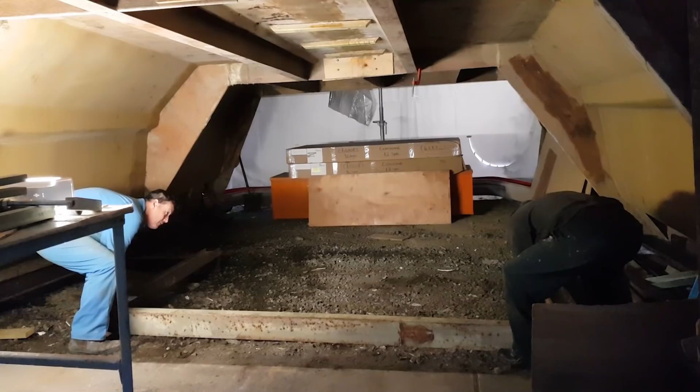But we're certainly not going to be demoulding it on video for a couple of weeks yet. There's a lot to cover before we get to this stage. I'll give you a couple of little sneak peeks before we go forward. The underneath frame of this mould needed to be reinforced in a certain way. We had a bridge structure like this, and when we lifted it, we wanted to make sure that it didn't sag. So that's where I'm going to start this video.

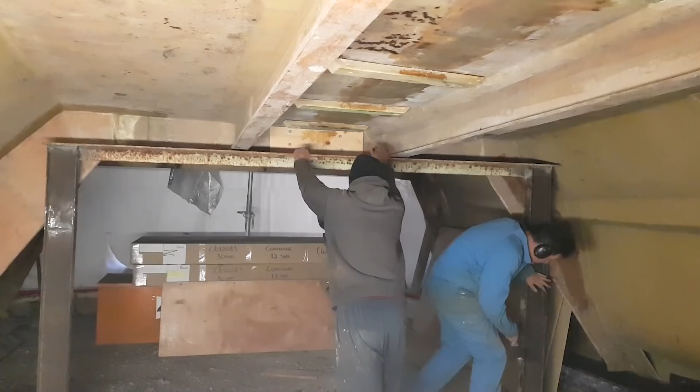I employed a technique where I welded some lugs to the framework of the mould and then used three-ton acro props to actually push the legs and the framework of the mould apart, to make sure that as I lifted it there was no chance it was going to cave and trap my boat in there or damage it. So that was the first part of this video.

The second part, we're going to go into getting this big rig back under the mould, and man, I don't admit to many mistakes, but I totally cocked up.

I want you to remember that this video was filmed in 44-degree heat. It was the hottest day we've had in over 12 months, and having my brother involved, tempers were frayed. There's a few little swear words in this, so if youngsters are watching it, please do not listen to my expletives as I do a hell of a lot of damage to my pickup truck, and just stupidity. When the heat's on and it's hot like that, you got to make very good decisions, and in this case I didn't. So let's get into it.

So the original frame that came with the mould was about 7 I-beams running directly underneath the mould at ground level. I actually re-engineered this about 18 months ago into a bridge type arrangement that went up and over and back down, and I'll put a link to the actual video up here for you to go back and see where I did all the welding.

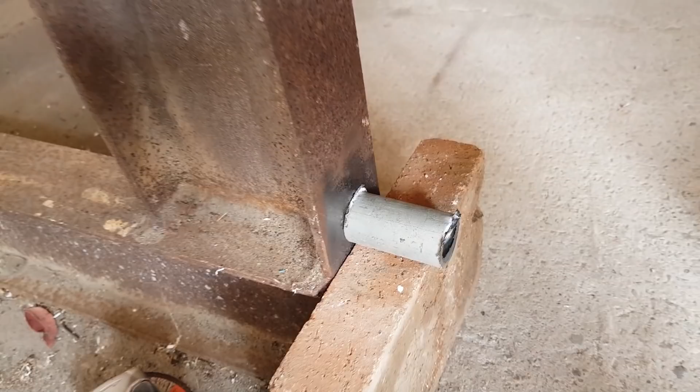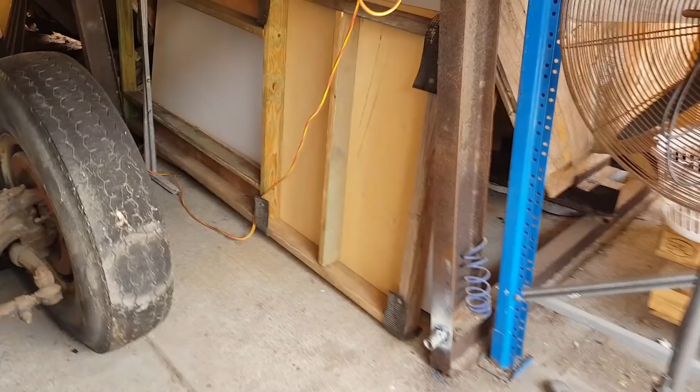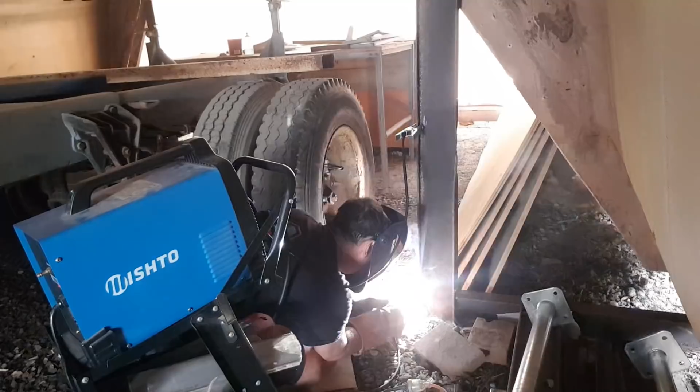But what I decided was that we needed some way of bracing the bases of these uprights so there was no chance of it collapsing inwards when I ultimately put the lift underneath. So I came up with the idea, and a couple of people had suggested that I put in a couple of acro props. In fact, I ended up with 3 attached to the uprights that still operated cleanly with the truck in place. These acro props can be tightened and physically tensioned outwards to hold the framework in the exact position that it's lifted in, and it ended up being a really good solution.

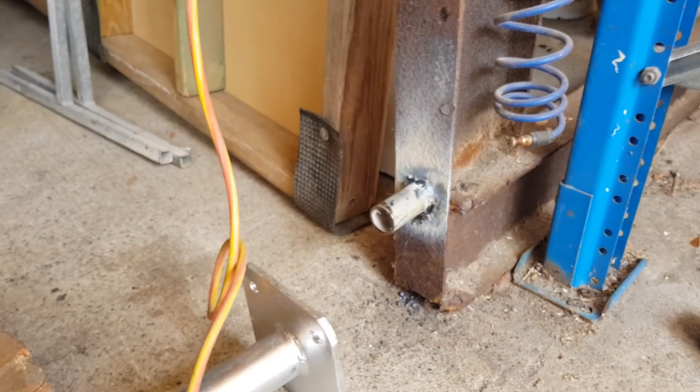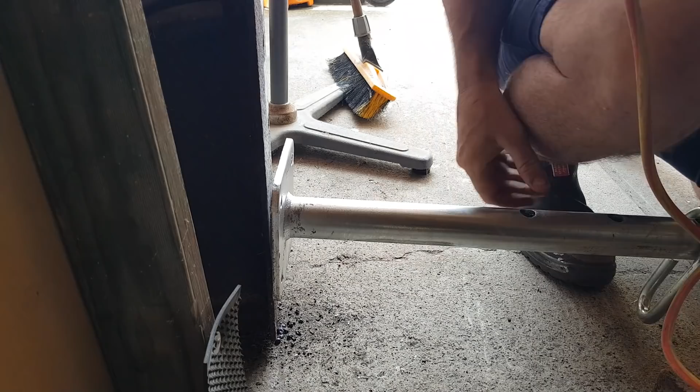It cost me a few hundred dollars to buy these new acro props, but by putting these in place I was able to lift the thing and simply remove them, then roll the truck out, and then put them back in place for when we ultimately crane the mould into its final resting place. You can see here where I've actually got it tensioned and the boat's off the ground. So there's a sneak peek of the demoulding day.

First thing I need to do is make the drawbar for the backhoe to tow this rig away with the mould on it, which is going to go about 80 metres down the road. The second thing I need to do is do the other end, so I need a pintle hook on each end. We're going to attach this to the bucket of a backhoe with a couple of giant shackles. That's going to be the easiest way rather than getting in a semi with a dog with a pintle hook closure on it. We know the rig works, we know it's going to basically tow it.

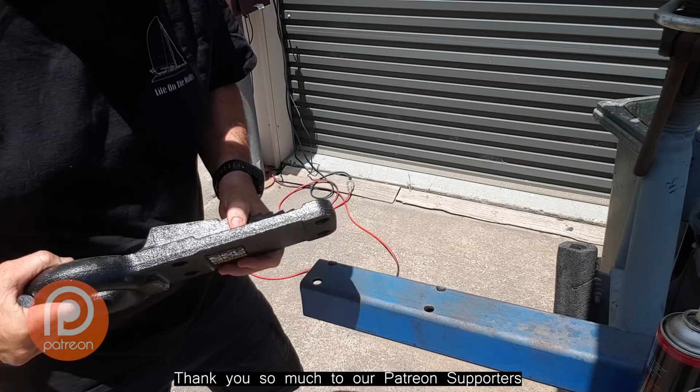Whether or not it lifts it is a different story. So I just spent about an hour drilling these holes out nice and slow. Only just got them to the right size. And I was in town today and I bought some high tensile pintle bolts. They're half inch, but they're actually designed for pintle hooks. So pretty happy about that. You know that's going to be good.

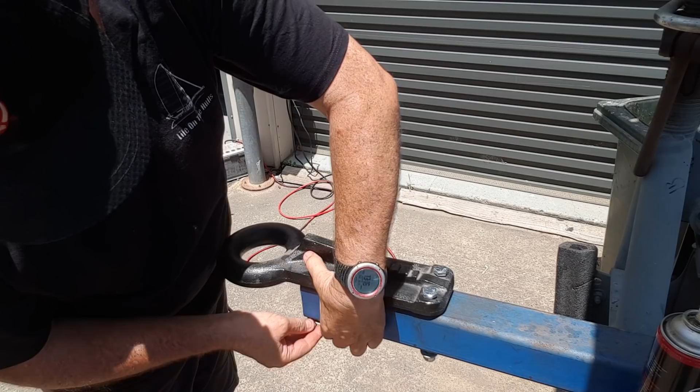I'm going to use this tow bar twice. Once to get the mould over to Greg's across the road, and the second time is to launch my boat. So it's not going to have a lot of use, but well worth paying for the good bolts rather than just cheap bloody coach bolts, which I considered using, but they were about 20 bucks cheaper and not worth the effort.

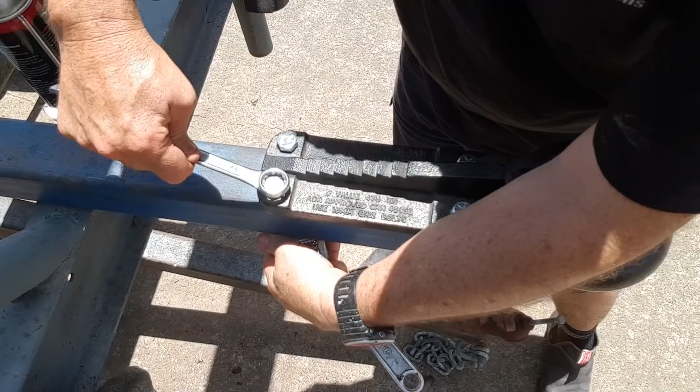And I'm back here. I've just pulled the site apart again, and I'm going to put that truck back in under there. I'm hoping I've got enough room because there's a boat here with a wheel off it right where I'd like to back, but there's always pallet jacks. I can always move a boat.

But yeah, this bugger here, we forgot about it, and it's got a wheel off. So I might have to put a pallet jack under it and move it back, because if it's in the way and I can't back this truck in, I'm in trouble.

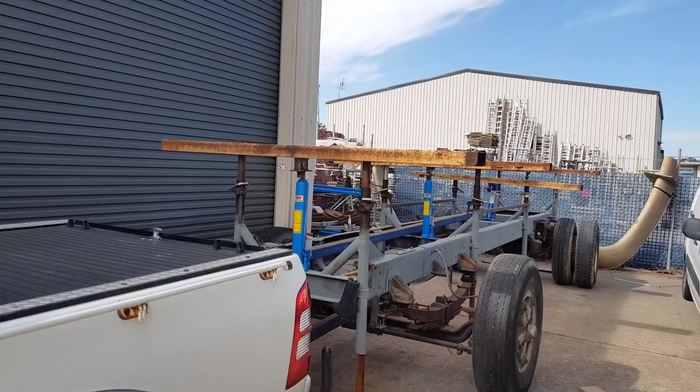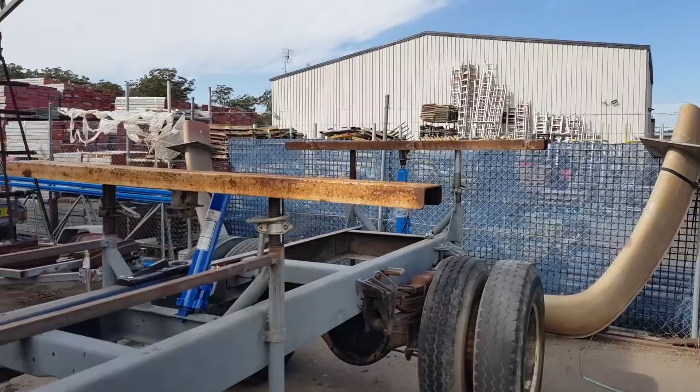But I've just done all the preps up here on the truck. I've got to wait till my brother Brett and Janet come up here for about half an hour, and we're just going to get these jacks all put in place. Still got to hose them all together, but I figure while it's the weekend and it's going to be 43 degrees here today. It was 42 yesterday, and I welded in all these gussets.

Had to worry about fire because I was really concerned I was going to set fire to the place. So you just got to be careful when you're welding in heat like that. It was a bitch of a day yesterday. I mean, it was probably the worst heat we've had since the fires this time last year, or in February or January this year.

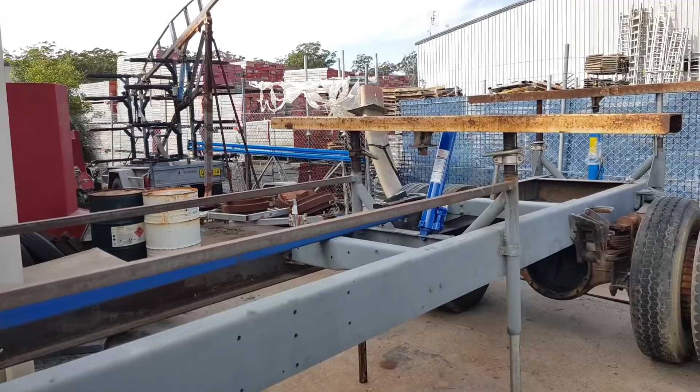But yeah, so that's all ready now. All the jacks are in place. Everything's functioning, I know everything's moving smoothly. Just got to get all these jacks lined up. Hopefully they all work, I haven't tested them all, but I'm sure they will. They're straight out of the box. But yeah, at this stage, we're on target for next Saturday's demoulding.

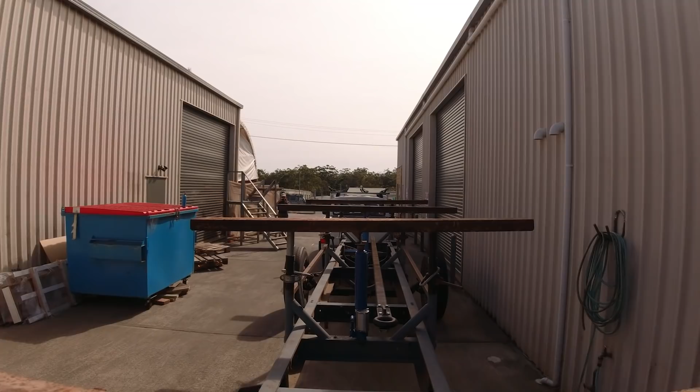Now I just want to draw your attention to a couple of things here. You'll notice here the Acrow props that protrude through the base of the truck. They're designed to go up to give support to the ultimate lift. Now you'll notice this particular one is actually only around 10 centimeters off the ground.

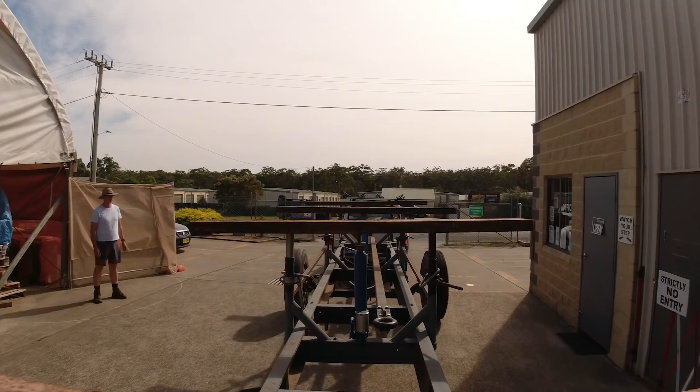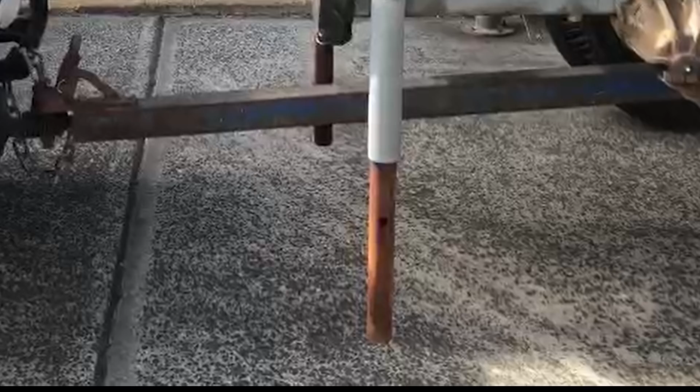Now I have a very steep driveway to navigate here, and in the heat and in all the excitement, I did actually neglect to lift this one up. This one at the front is particularly the only one I really need to lift up, and the result, yeah, it wasn't very nice. It was the beginning of a bit of a problematic morning for us, and I'll show you why.

Took a chunk out of the road. Oh shit! Just bent my Acrow props, didn't I?

I'll go forward and we're going to take it again. Right, stop.

Can't go forward, mate.

Rossco, forward about a foot. Rossco, just take it forward a fraction, mate. It's just, this is caught under your back here. You've got to get it forward so it just drops so we can get this out of the way. Speed, just, Ross, just take it forward, it'll come off. It'll go higher if I go forward. It will. Do you want a hand?

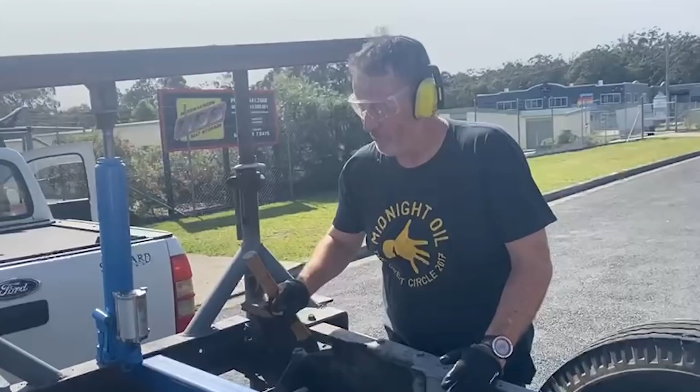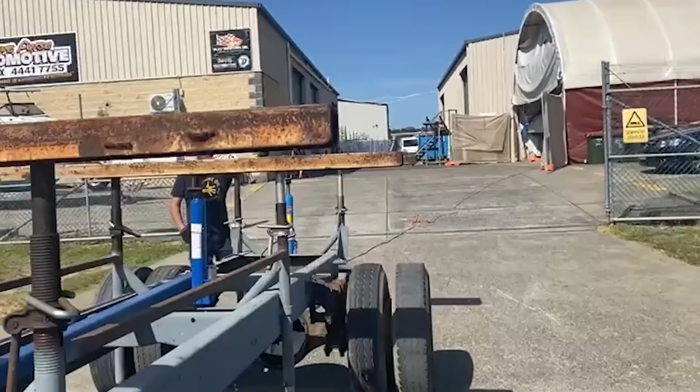Do you want to explain to us what's going on here, Rossco? Look at the car, fuck me dead. I've got it on film. Don't you worry. Yeah, I think we need a bit of slow motion for this moment, though. This was my fear, this was my fear, and it happened. But the Ranger held true.

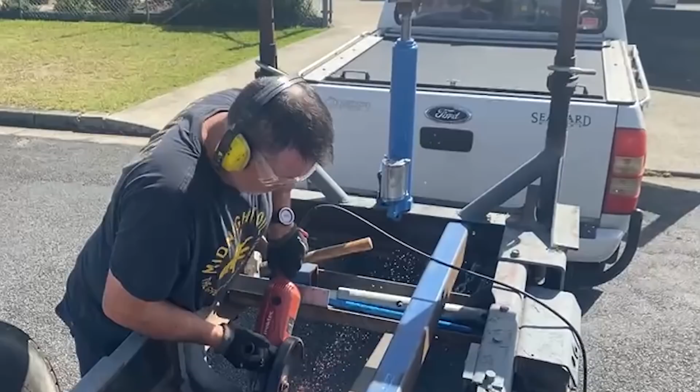One way to fix something, mate, with an angle grinder. Good job you can get them cheap, eh?

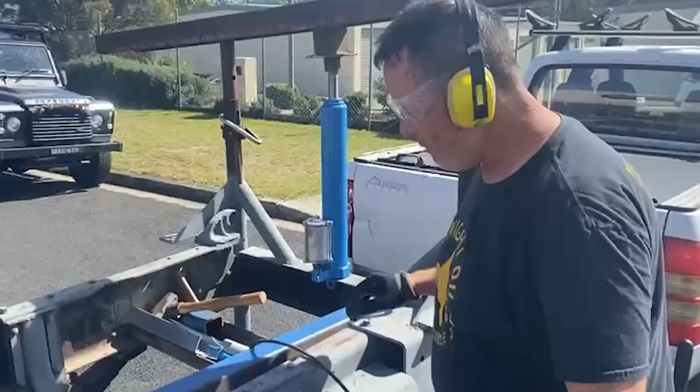So the problem with this chassis was that it had an engine cradle there that was actually quite low. That did need to be cut out because that's actually one of the reasons why the drawbar at the angle was forced upwards and jumped off the pintle hook. And the second reason why was...

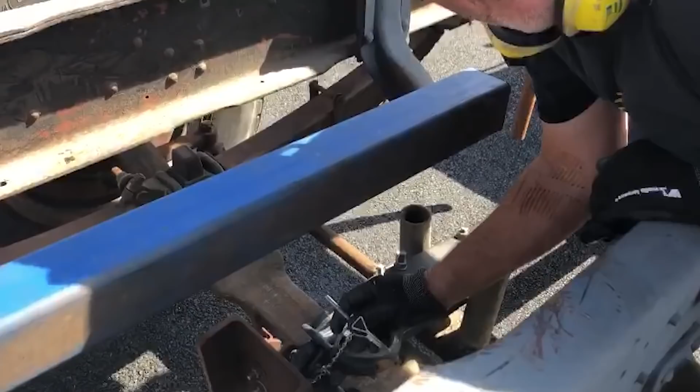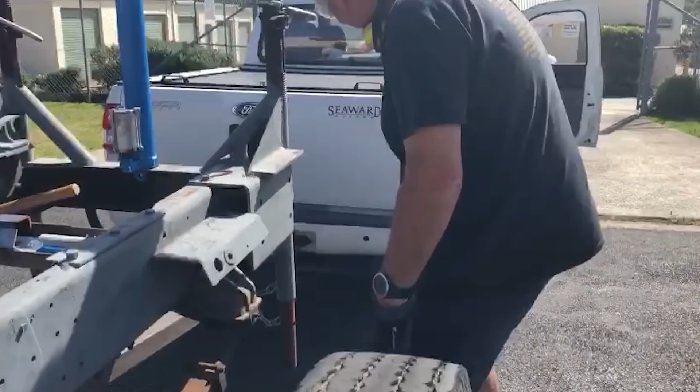You got it? What's that thing? Okay, there's a good reason why that came off. It's because in my excitement I forgot to put the pintle hook spring in, or the pin, that will stop it popping off. So hopefully that's the end of it. Actually not too bad given what it could have been.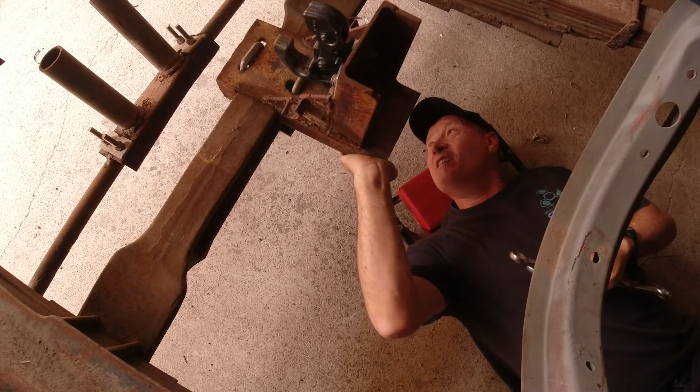Once again the effort with the steering began, and in that effort we realised we had a problem with the centre pin of the steering leading from the pintle hook. All that earlier action had actually moved the centre pintle hook bracket I'd welded up and put in, and it had become loose and slid sideways, creating more work.

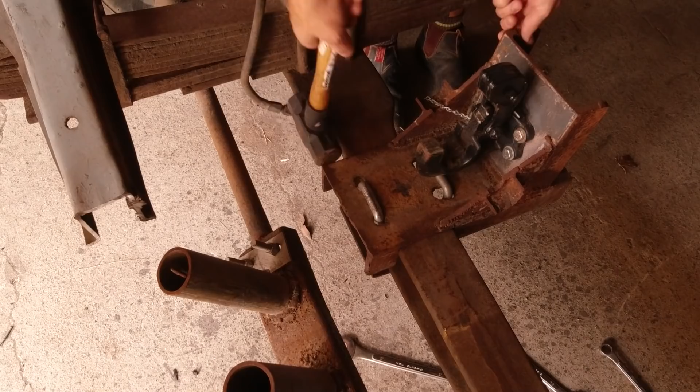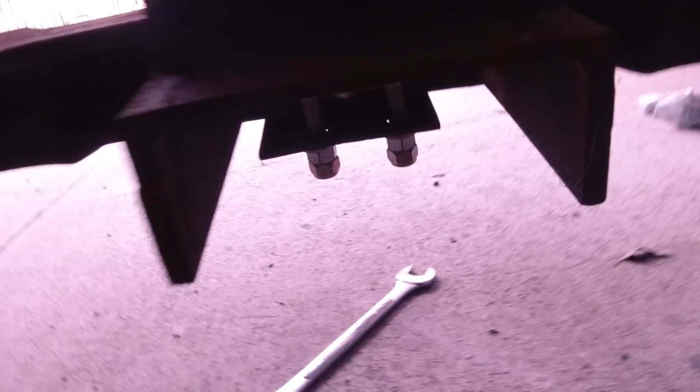As a result I had no lock on the steering. So we used a pallet jack and a trolley jack to manhandle and drag it back under the mould. Ultimately we got it back in place, and I was then able to reposition the pintle hook into the centre where it belonged, welding the bracket to the cast bogey.

Problem number two: this Acrow I had to grind off, so it's a write-off. I've just found a replacement. I'm hoping it's going to be long enough to do the job, but it's going to need a little bit of work on it.

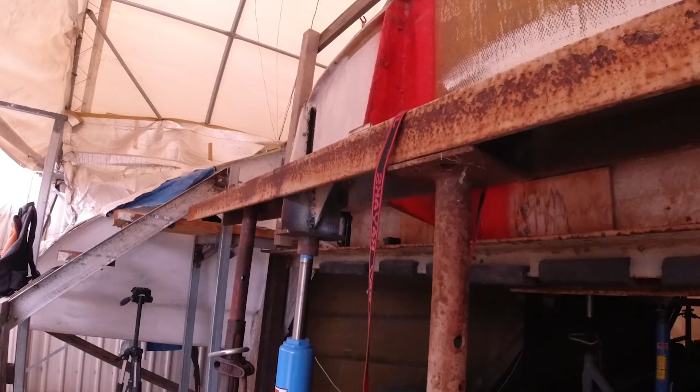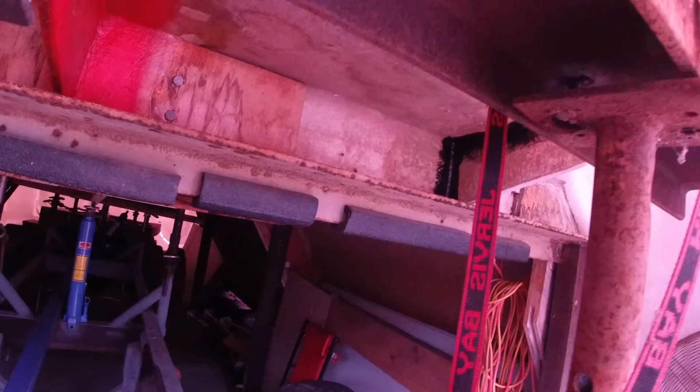The issue here is that this isn't going to line up. So if I want to use this one, I'm going to have to grind off the edges and re-drill the holes for the studs to match this one. It might be a cheap solution rather than buying a new Acrow. I'm going to grind that off and square it up a bit - it'll be more than enough.

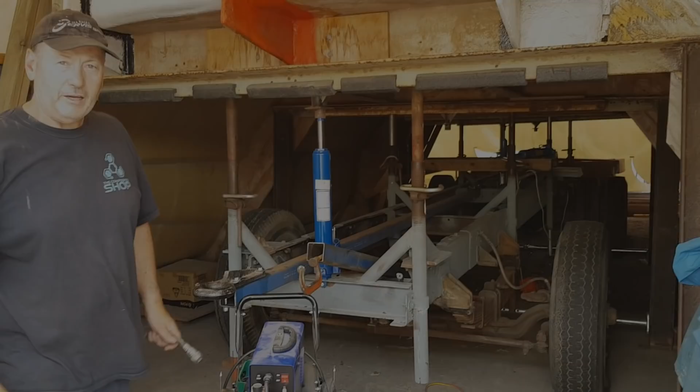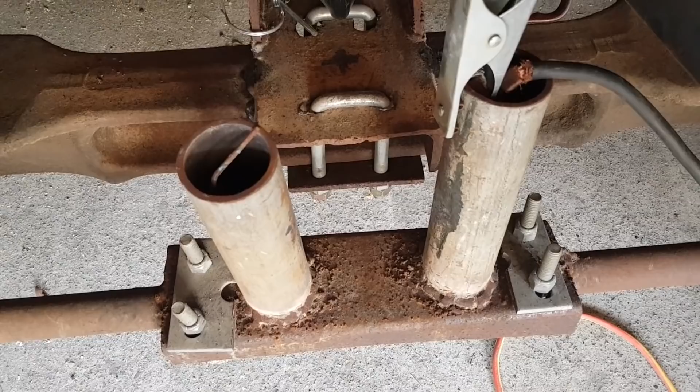Okay, next job, ticking off the list here. We've got to blow some holes in the steering pipe so I can put a chain over the top. I'm going to have to use my plasma cutter because it's water pipe and I can't seem to get in there otherwise. I'm going to blow a couple of holes in just so I can hook shackles up to attach a chain to the top, to stop the drawbar from popping out.

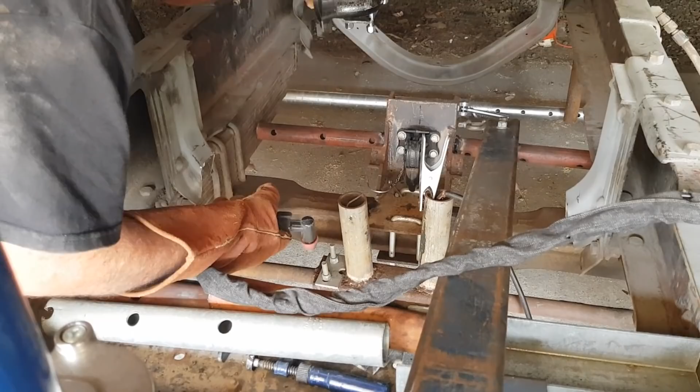So there, you reckon? Whatever you say, Captain. Right, that'll be alright there, won't it? Aye, aye.

Very impressive, isn't it? Much better than drilling, mate, eh? I mean, plasma - it's not exactly a hole, but it does the job, doesn't it? It's an absolute beast, isn't it? It's like Star Wars, I just love it.

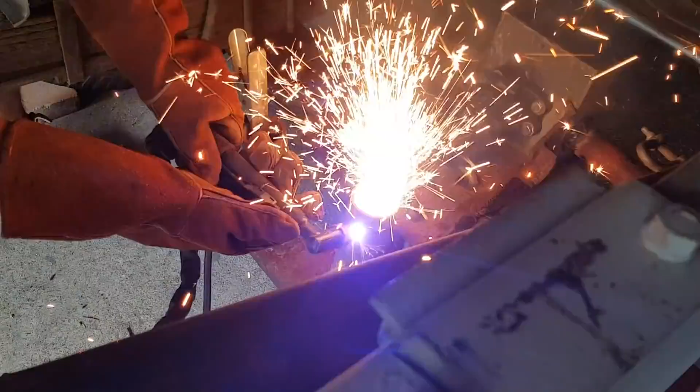Mate, beautiful, job done - look at that. Aren't they amazing things, eh? Can you kick that chain over to me?

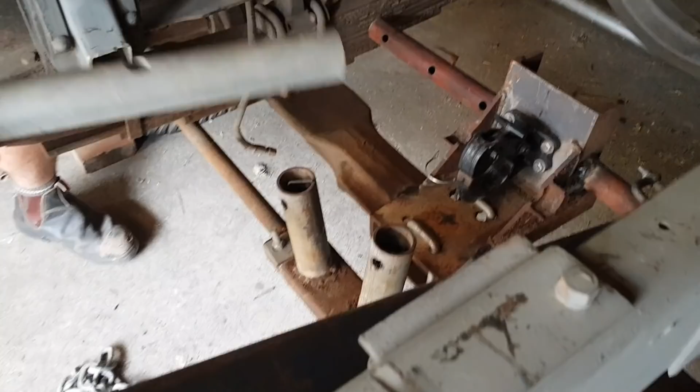Alright, so imagine the drawbar just comes over the top - imagine the drawbar is hooked in here, that's the drawbar. What I'm going to do is hook a chain from there, over the top, with a couple of shackles.

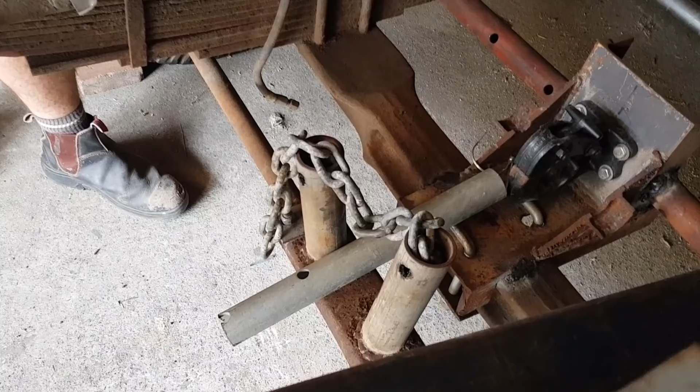Done - you've done well, I reckon that'll be fine, eh? Yep, alright, cool, job done. That's the last job I need to do on the truck.

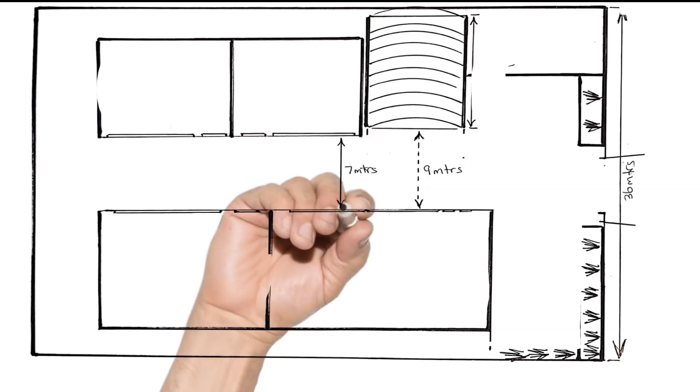Now with the truck all squared away, I want to discuss the site constraints we have. We have quite a deal of problems here with the site itself - it's 36 metres wide, with a number of buildings on it. If you look at this drawing, which is actually to scale, you can see the building opposite my tent, the Catamaran tent, is actually 9 metres away from the tent itself, and the boat itself is 12 metres long.

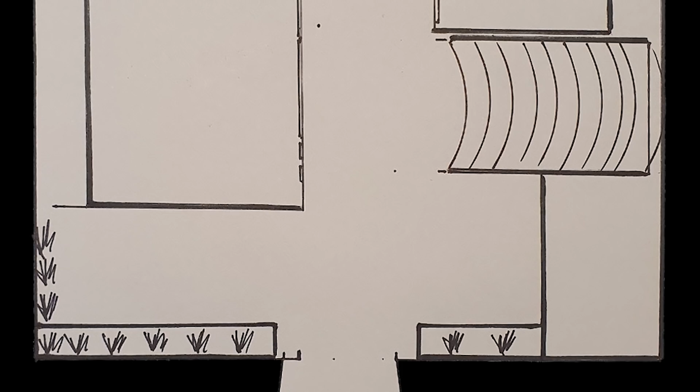Now I'm going to do an animation here, and I've put quite a bit of work into this to try to explain how this is all going to unfold. We have the actual tent site with the hull in it currently, and the truck has been driven up and placed back under the Catamaran hull. In the coming week I'm going to be doing test lifts to make sure that all works, but you'll see the hull itself, at 12 metres long sitting on the truck, has to then roll out - though there's a slight constraint with the tent and also a squeeze on the other side with the building there.

The hull will then be demoulded with a crane, and then the truck or rig with the mould on it will roll out of the gate and down the road to be stored at our mate Greg's place down the road. We've come to an arrangement with him for storage there, which is fantastic because it's going to allow me to progress quickly with the boat demoulded.

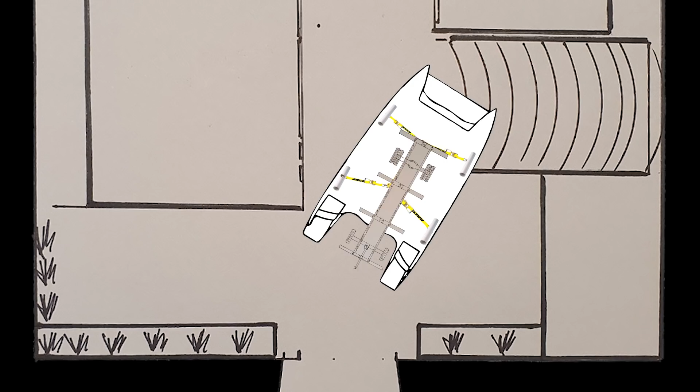The truck will then be brought back into the site, put underneath the fresh white Catamaran hull that we've just demoulded, and then it will be put back in place in the tent. So there's a lot of lifting, a lot of moving - it's a mega move, and it will be a difficult morning when it actually happens, but we're getting ready for it.

The next week or so I'm going to be doing quite a lot of prep for this, so stay tuned guys, and I'll see you next time on Life on the Hulls.